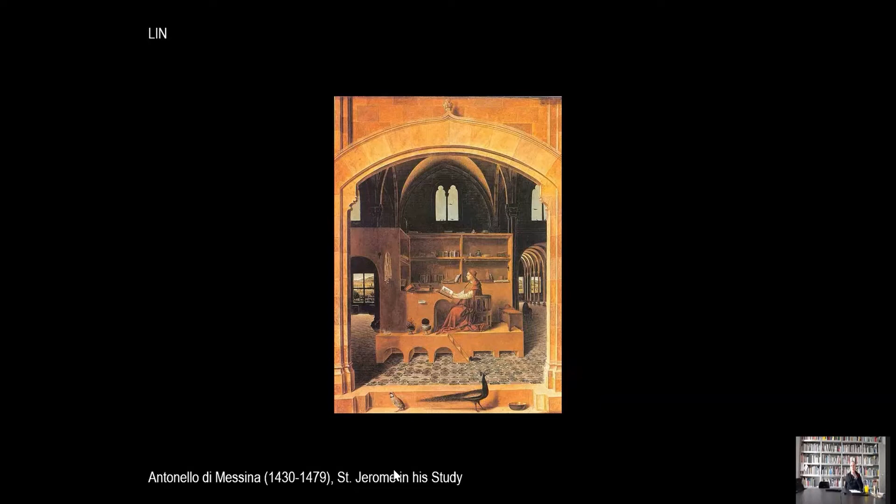I think that's probably what we try to find also in urban situations, in our urban projects—that we don't believe in a predominance, in the absolute importance of architecture, of the places, but also the actions which are possible inside.

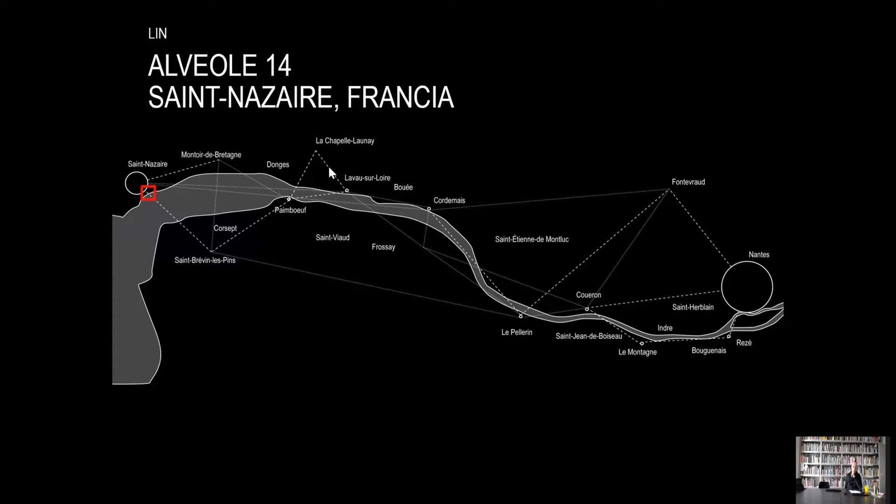And he explained things which were really difficult for us, because it was about the aesthetic of this kind of building.

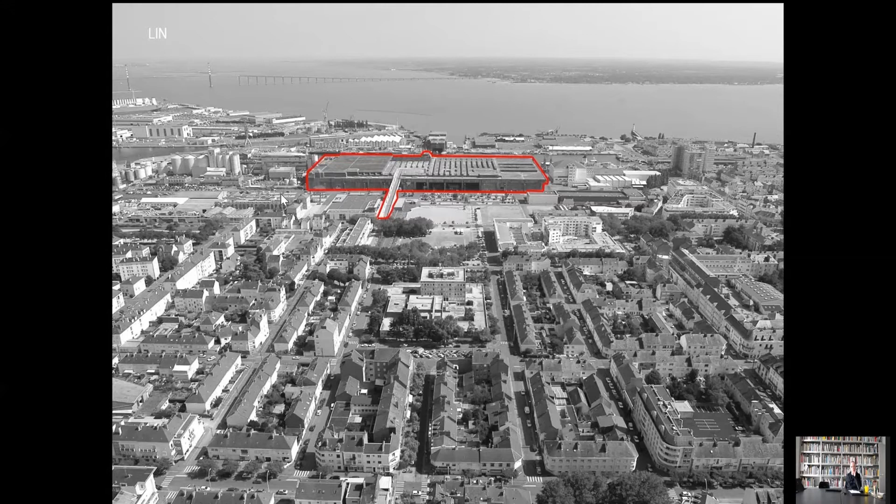You see here the reconstruction, a typical French reconstruction of the 50s by Le Maresquier, an important post-war French architect. You see here the submarine bunker and the bridge, which was conceived by Sola Morales in the 1990s.

So the starting point in many projects in France is that the mayor is really important, and the mayor of Saint-Nazaire, his theory was that the city, which is turned towards the inner country, should turn once again to the harbor. In order to do so, the bunker could be, or should be, a very important step.

His theory was that we shouldn't destroy the bunker, but we should emphasize it and work on it, because if not, nobody would understand why the city is how it is today. So we won the competition for only a small part.

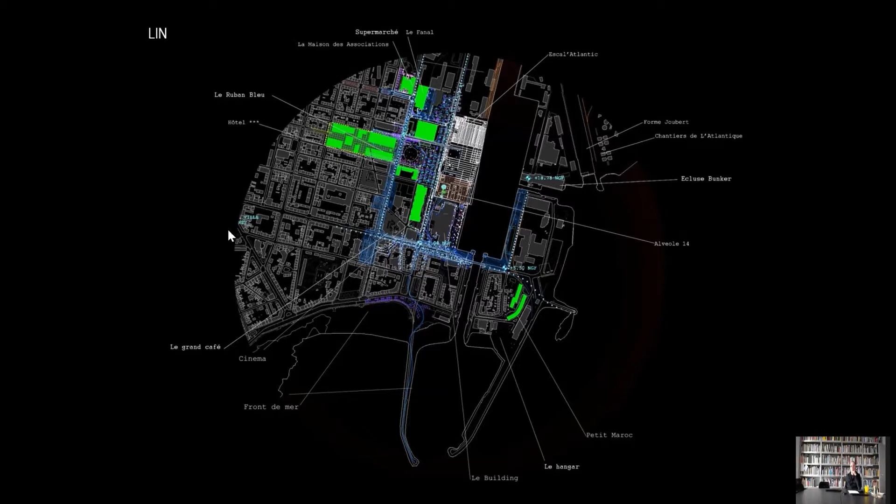We kept even the bassin. We try to work with it, but it's very, very hard. On this side and on the other side, we have the center—sorry, it was not on the right image.

Here you see the bassin, the Center of Emerging Arts on this side, which is open to the harbor with a movable door, and on the other hand, a kind of center for emerging music.

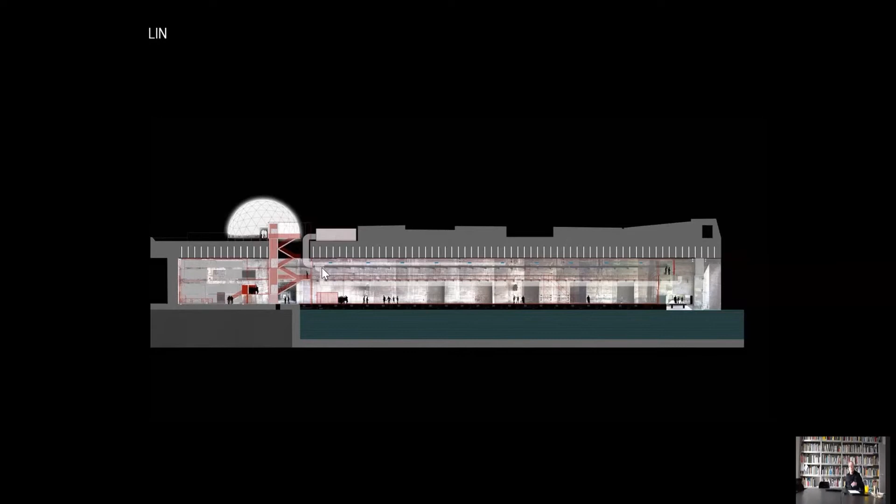We try to do as little as possible, really in order to keep the atmosphere, the quality—even if it's perhaps a terrifying quality—but the quality and the strength of the space.

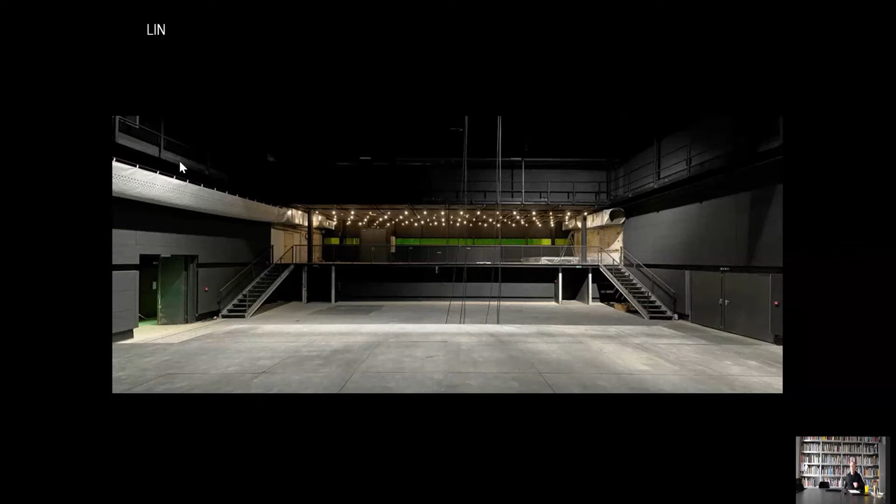On the other side, one view of the Center for Emerging Electronic Music, which is in a kind of bunker situation because it has a lot of studios and very important acoustic issues.

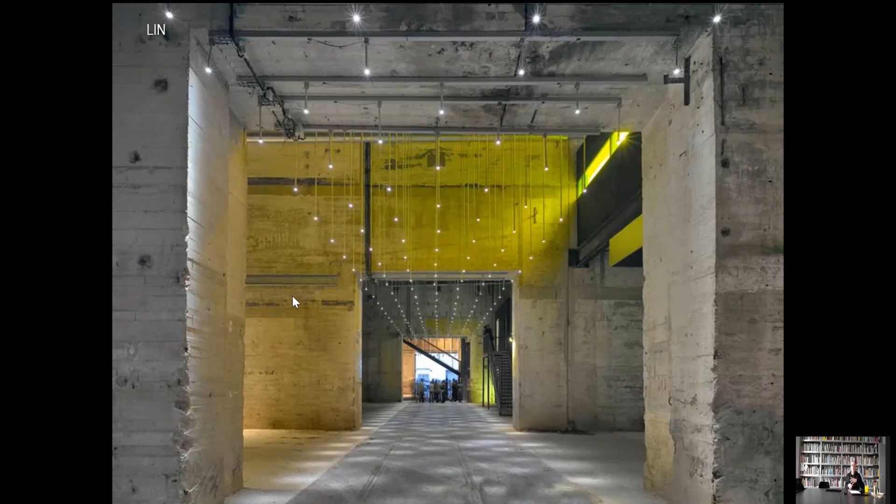Connecting all this, we opened up only a door which finally already exists, which is a kind of lateral inner street, where once again we worked more or less with nothing.

We have here a kind of carpet of LEDs. Here you have part of the musical center. And then one point which seemed to us really important was to connect this inner street with the roof and to open the roof.

I think that was probably the most important point why we won the competition, and on the other hand the most conflictual part, because opening the roof would also mean opening 3 hectares of a concrete desert, and nobody knows what to do on this roof.

So we installed here this kind of Piranesian staircase. We made this hole here, you see—this is only a part of this 4-meter concrete—in order to step onto the roof.

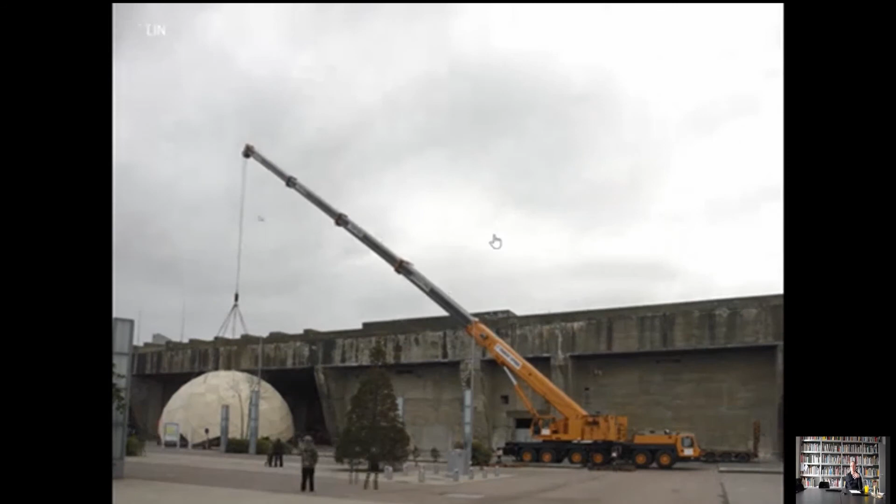At that moment, the radar dome of the airport of Tempelhof—we learned from friends that it would be dismantled. Finally, we managed to get this kind of dome. To bring it, we had to completely put it in pieces. We even had to learn the statics and calculations of a kind of Buckminster Fuller construction.

And we finally could install it on the roof as a kind of starting point, I would say a pioneer, to think about the future development of the whole bunker, but also the possible uses of the roof.

So here you have one slide of this part of the Emerging Center for Emerging Arts. A second project in France, once again also in a kind of military context, is Saint-Étienne.

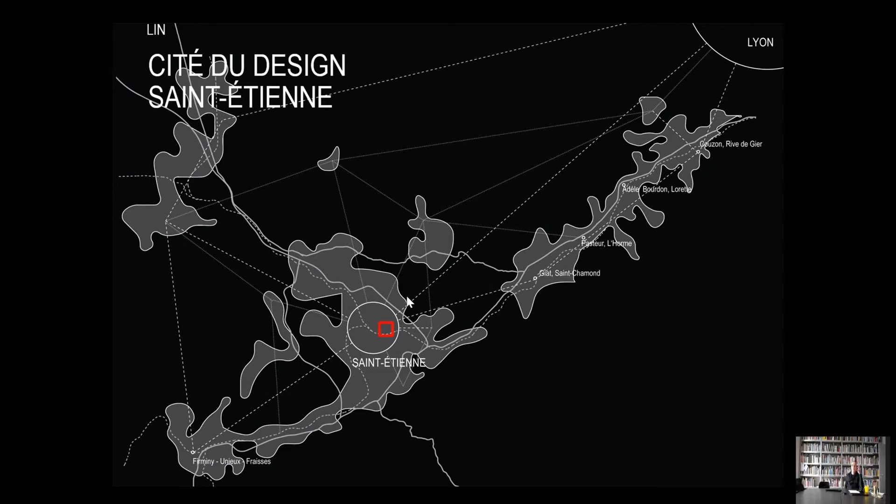Saint-Étienne was an important city in the last century until the 60s, 70s. There were a lot of steel mills and manufacture. There were weapon manufacture, but also kind of catalog manufacture a long time before Amazon or else.

And in the 1980s, 90s, there was a big decline of the city because the steel mills, the coal mines, the manufacture all closed down.

The idea already in the 80s, 90s was to build up on the idea of the manufacture, and they created La Biennale du Design, which became quite famous and was a kind of starting point for the municipality to think about how to reactivate the manufacture site, with this idea of design, a reinterpretation of the history of the city, and to transform finally this huge site, which was a kind of forbidden site because of the military issues.

Only the workers could go there, and the idea was to open it, to install a kind of national design institute, which includes exhibition, design school, an architectural school, archives, exhibition spaces, all kinds of materiotheks, all kinds of things, all turning around design.

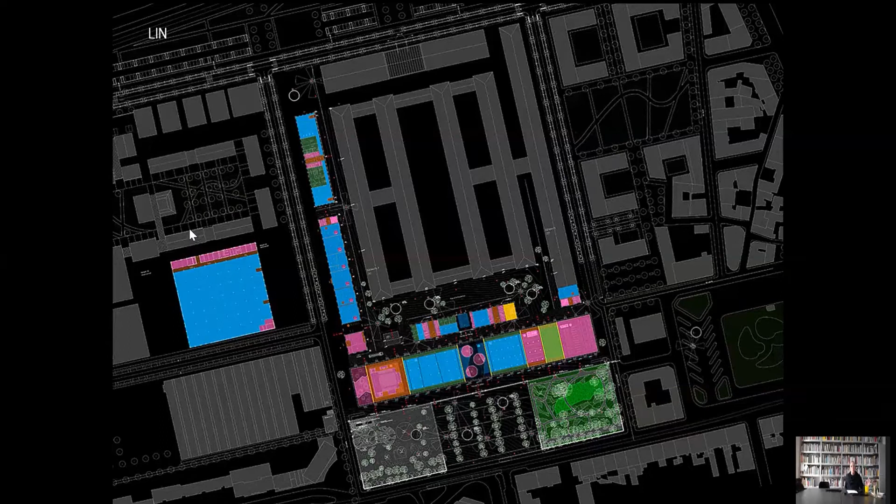You see here some views of the exhibition part, a kind of auditorium in the Platine, the library and the materiothek here, and the greenhouse on this side.

And then on the other side, these really fantastic spaces, which were in a terrific condition when we arrived, but it needed not very much in order to make with these buildings very beautiful spaces to work in different scales and with different possibilities.

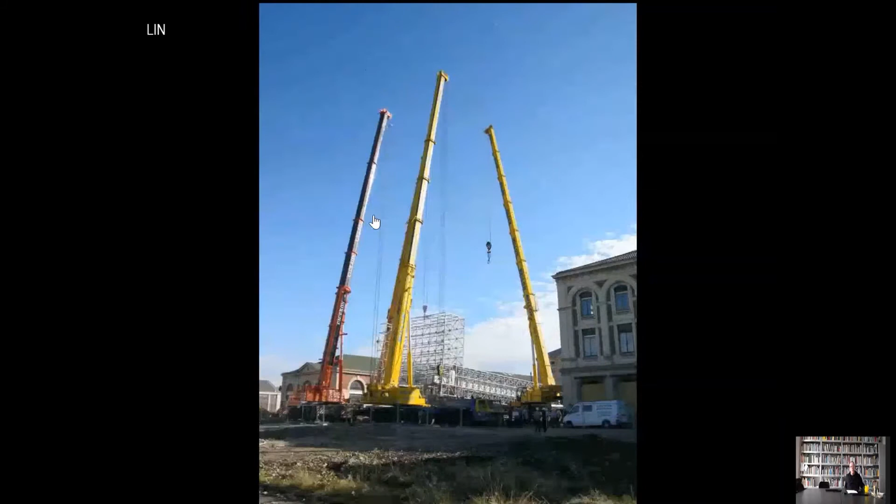So here you see this, at the very beginning we convinced the municipality to build this really at the very beginning in order to open up the site and to give the possibility also to the people of Saint-Étienne to discover the manufacture and then to discover little by little the construction of the new institution.

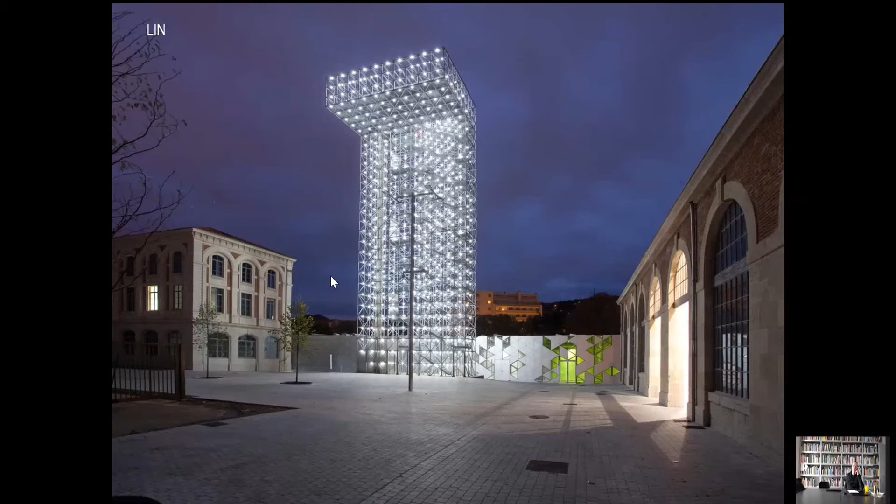Here one last view on this project. So here, for example, you see an opening. Sometimes we had to open parts, we had also to demolish some parts in order to connect everything, but we tried to do it with a very minimal impact in order to give the possibility to these existing buildings really to play their own role with their own quality.

In a completely different scale, around the same time as the Cité du Design, we had been invited as one of the 10 teams of the Grand Paris. Sarkozy named it Grand Paris Métropole post-Kyoto.

Very roughly, the intention, I think, at this point of Sarkozy, of the president, but also of the Ministry of Culture and a lot of people, was to get rid of this kind of extreme situation where you have Paris, which you see here in the center, which is finally a very small part of the metropolitan area of Paris, with 105 square kilometers, where you have all the richness, all these fantastic situations, and around you have what was named, or what is still named, La Banlieue, with 3,500 square kilometers. And this distinction, or this rupture between the center of Paris and the periphery, is really very difficult to compare with other metropolitan areas such as London, Berlin, or Tokyo.

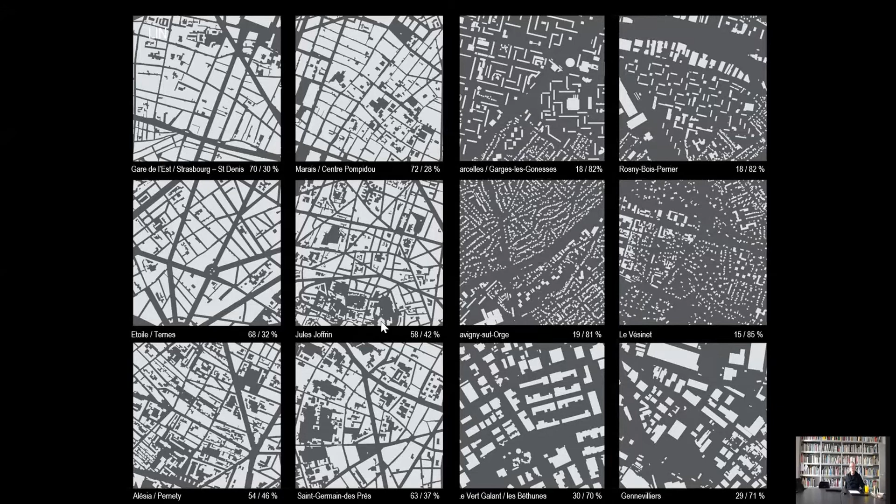One very specific point is that this empty, unbuilt space is not an open space, not a continuity, but a kind of patchwork of little entities which are all closed off from one another. This makes this open space quality not at all relevant in the way it could be.

In our work, more and more, we started to think about the polarities - urban polarities, industrial polarities, cultural polarities, big forests - and three important themes emerged. On one side, the polarities and la ville légère, which we think is perhaps less dense, less defined, probably more provisoire, but more flexible, and which is a very important value for a metropolitan area.

Then the important issue of mobility, which in France is overall very concentrated to the center, and how to create a network which could be much more rhizomatic.

And the third part is integration - bringing forward the really fantastic natural sites which are in large part hidden today, and where it needs not so much in order to bring them back into the mental map of the Grand Paris.

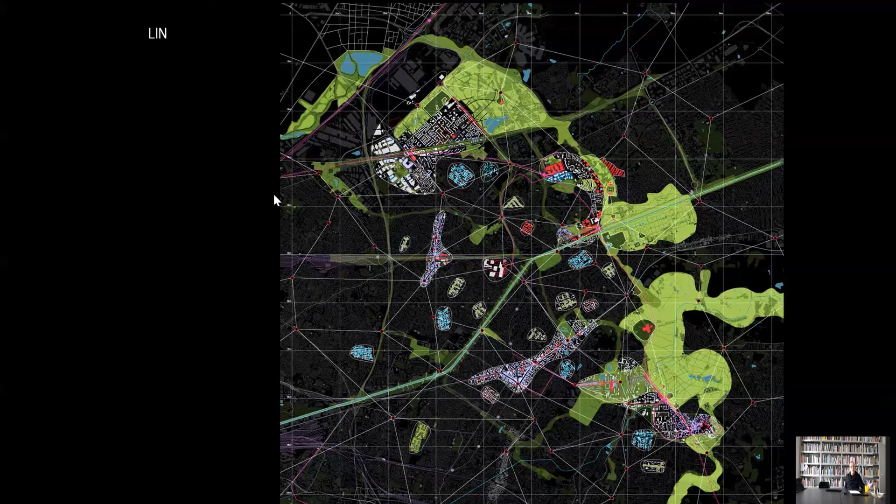Here I can show only some pictures. I mean, this kind of...

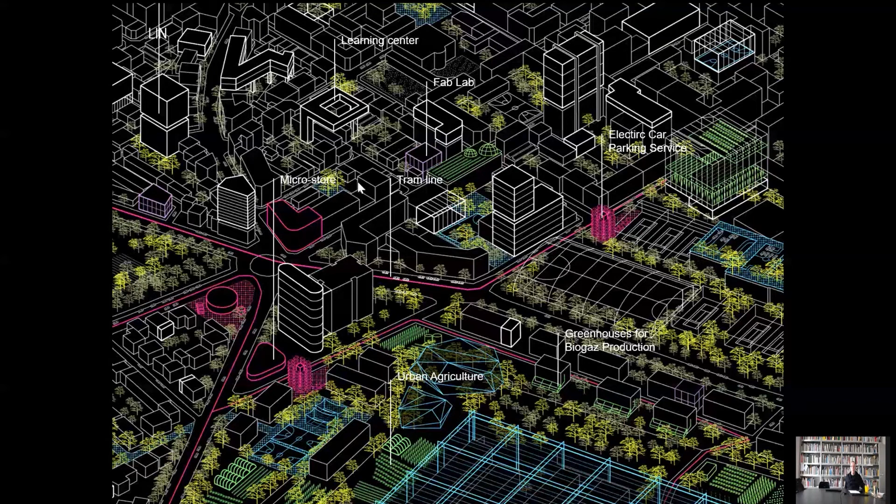It's too difficult now to explain in detail, but what is important for us is not to change radically the cityscape, the skyline, the urban density, but more to try to find what are the missing points, what are the already existing qualities, and how we can start as little pioneers to improve, to intensify much more, to intensify rather than densify the existing situation of this kind of entre deux.

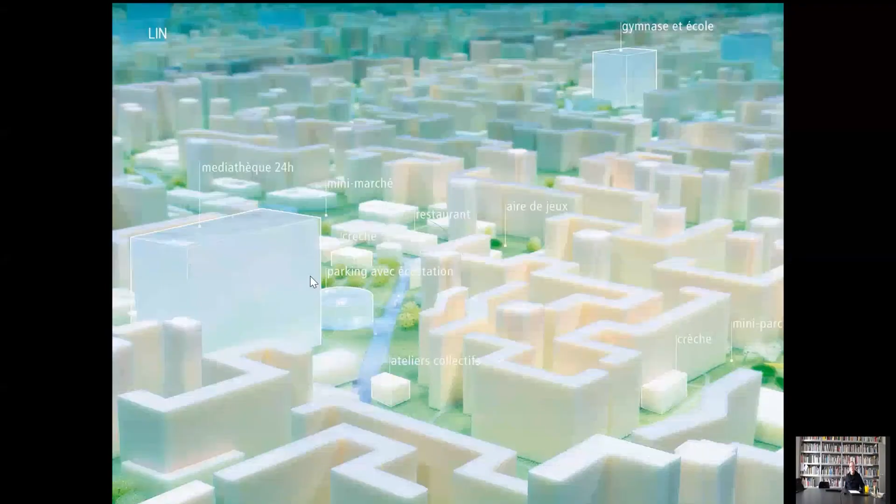Here more work in quite difficult conditions in the Grand Ensemble. And here, of course, this kind of ville pavillonnaire, this single family house carpets. Also here, how perhaps to connect sometimes, how to bring a different mobility, so that people don't have to use the car always, but also to bring sometimes wherever a Fablab, a school, a kindergarten, in order to make these areas more sustainable.

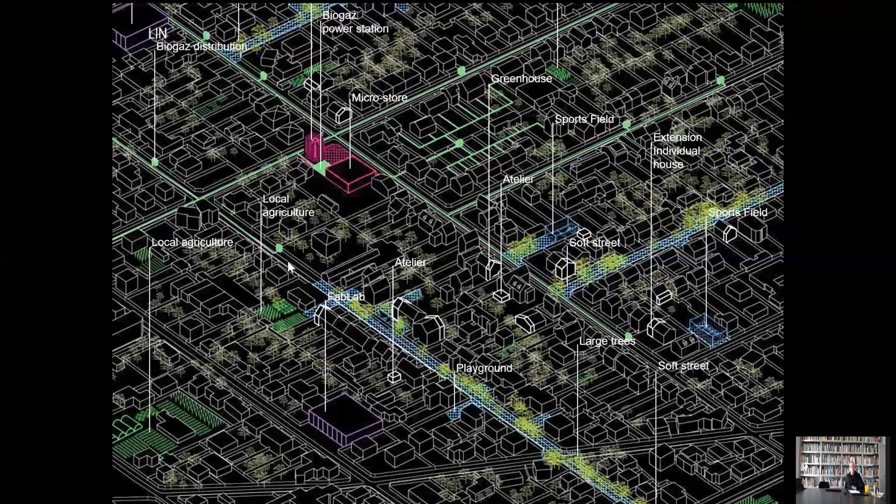No, that's radically different. It's for us really a kind of, it's the opposite.

We won a competition in Paris on the front of the Seine, one of the very last spots which were more or less empty. There was an old La Société des Explosifs, a kind of Dynamite Nobel, French Dynamite Nobel, a little factory, which had to leave, and we won the competition for this part here.

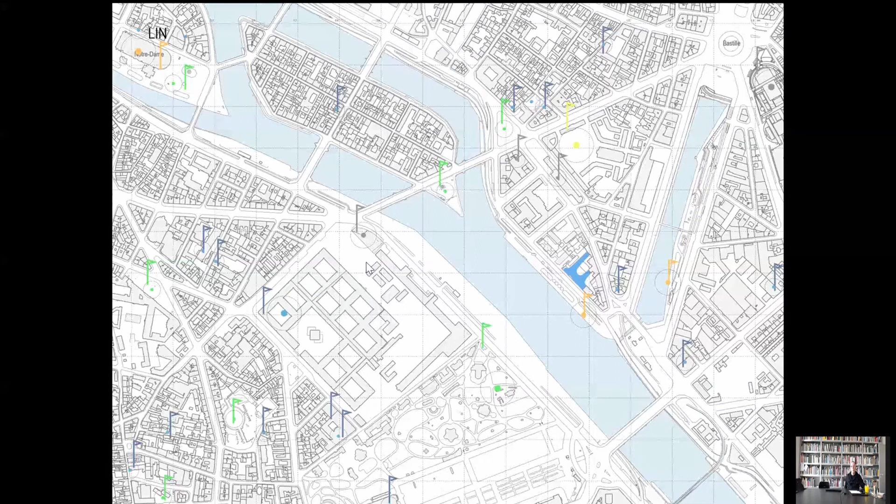Respecting very strict urban rules, with one advantage, that in Paris for this kind of project the city now obliges the developers to build 50% social housing. That means 50% social housing, which the developer has to sell back to the city for a very low price, which means that the rest of the apartments have to be even more expensive. And so it became really a kind of very difficult exercise. You see here the building with a large opening to the Seine.

Perhaps what you can see here is that these floors are higher, and they became lower and lower. This has one reason: we made a building which is very deep on the first floors, and it becomes more normal on the upper floors. So the deeper it is, the higher the apartments are, and the higher they are, the more expensive; the lower floors are, by contrast. So there's a kind of balance between different qualities.

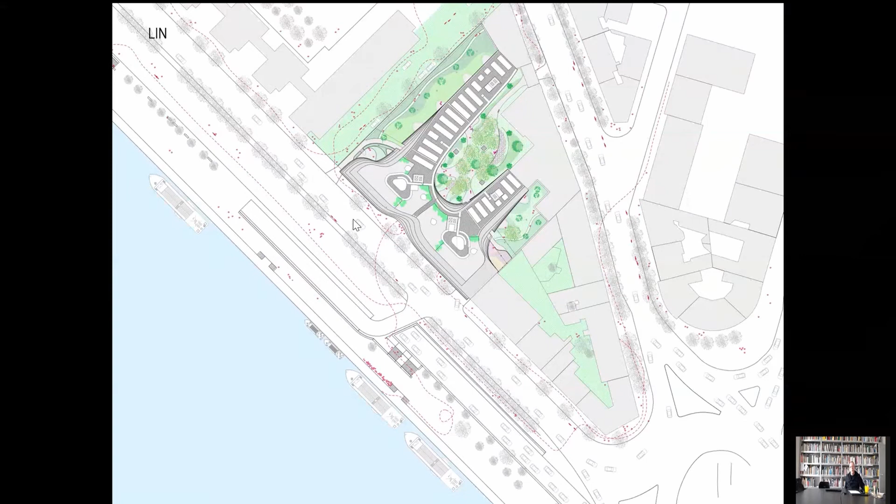You see here a plan with this front. Of course, these are the expensive apartments they sell, and these are the social apartments. One thing which was really important for us, and I think we succeeded quite well, was that all the apartments here go through and have a lateral view on the Seine. And these inner apartments also go through, and they have two gardens, which you will see perhaps here.

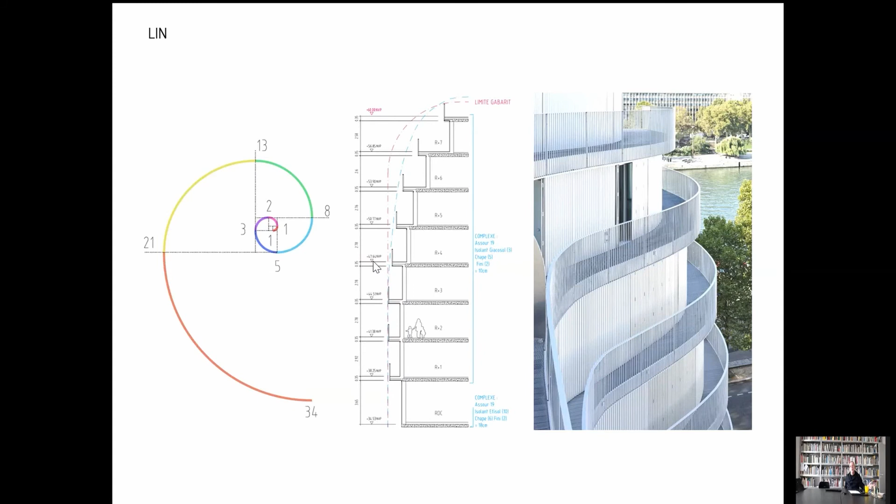So here it's this kind of Fibonacci—it becomes more and more, less and less high, and it steps back, so that here we have normal depth, and here we are 16 meters deep. You see here Notre Dame.

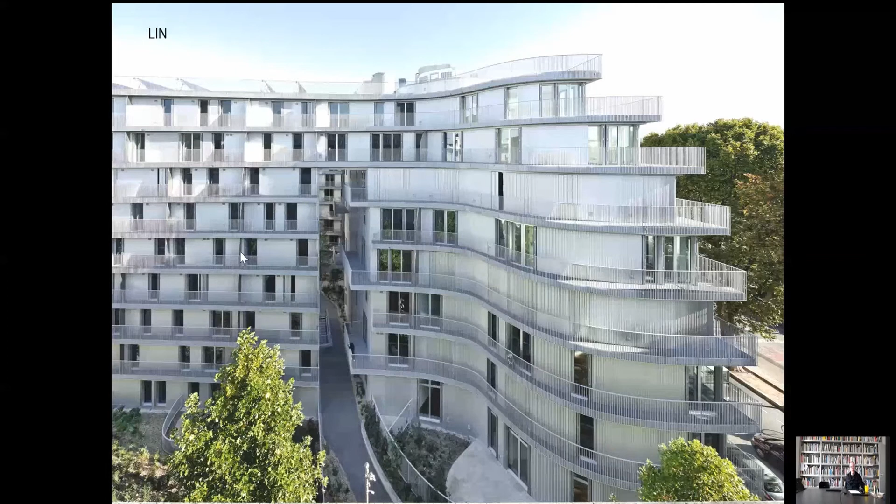You see openings to the inner squares. Another point which seemed really important to us: normally in these projects, the developer side and the social housing side have a completely different architecture and facade, but we convinced the developer to have exactly the same quality, the same material. The only difference you see here is that this side has one floor less, so it has higher spaces, but at this point they meet again. Here you have 1, 2, 3, 4, 5, 6, and here you have 7, but they all have the same height because they have more or less the same depth.

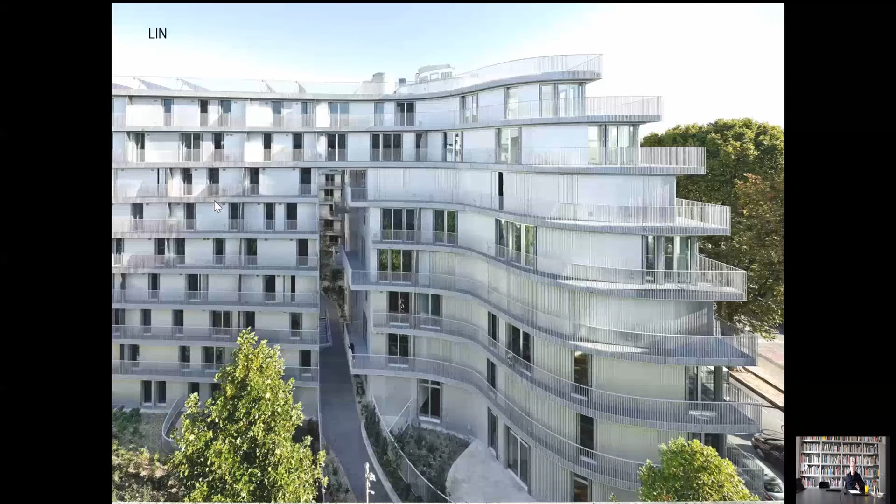This floor plan, which was really a kind of long research, led finally to 71 different floor plans, which were also quite a nice challenge for us. Here you see the inner part. Okay, now I come to Germany—I have to speed up a bit.

You have finally these periphery situations, not in the periphery, but sometimes really in the center of the city. And that creates a very interesting and very specific quality, if I can say.

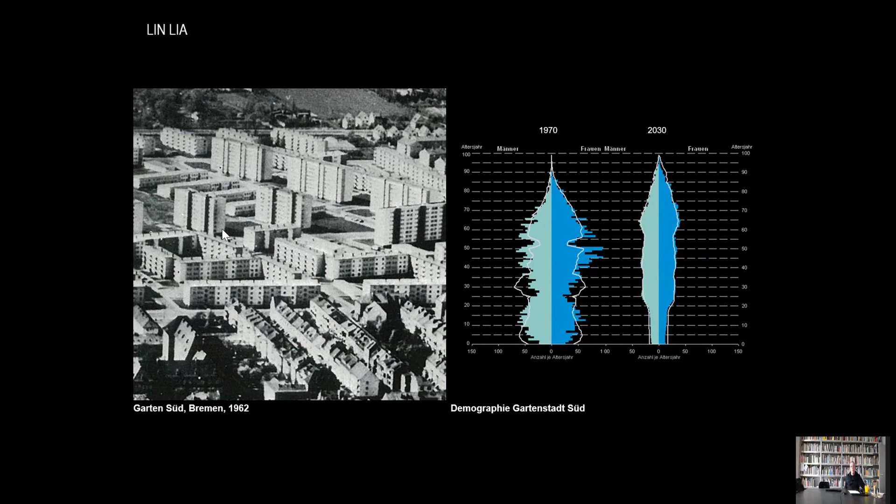This quality leads to a situation that the people who occupied the apartments when they were built in the 60s - you see here the demographic distribution then, and this is the demographic distribution today - because these people like their apartments and they stay, even if there are real issues: the apartments are old, there's no proximity services, 80% of the apartments are all the same, 3-room apartments with small bathrooms, not at all adapted for elderly people, no elevators at all.

So there are problematic points, but on the other side, the people like to live there. It's this kind of, entre guillemets, Gartenstadt idea, which the people really appreciate, and they would like to stay.

In this situation, the city and the shareholders of this Siedlung know that the problems will grow now with the people becoming older and older. So they started a kind of experimental competition: how to change, how to give a kind of mixity or hybridization in this kind of area.

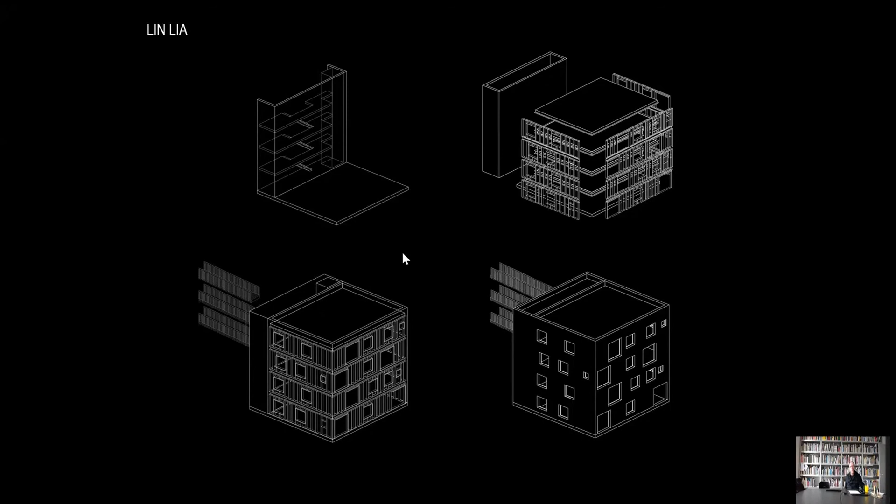What we proposed here with our idea of Bremer Punkt, which means Punto di Bremen, was to develop a very small unit, 13 meters by 13 meters, with a prefabricated concrete frame, no cellar - no underground construction - and all the rest in wood, in order to be able to build very fast with minimal impact for the people living there, and the possibility to bridge these buildings with elevators and different apartments, possibly to the existing ones, in order to give the existing people access to elevators, and perhaps also to generate multi-generational apartment types.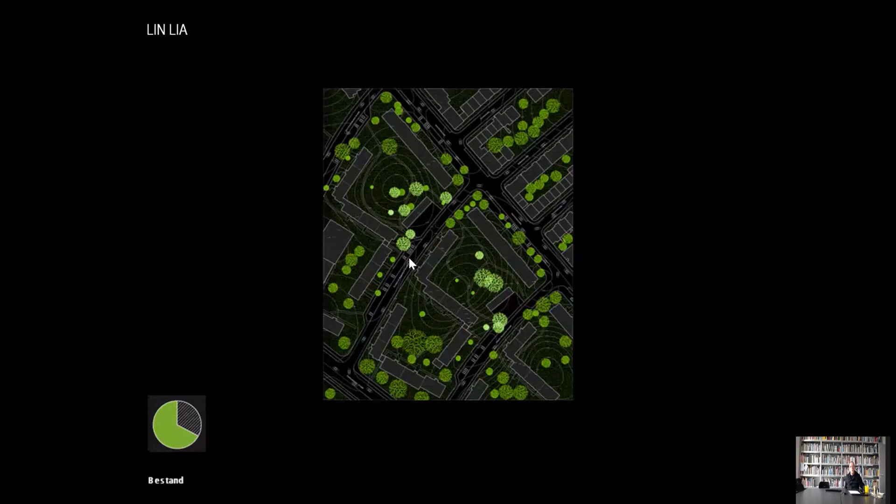So that was our proposal, and it was a kind of experimental proposal. Finally, the shareholder of the Siedlung asked us to make a prototype. Here you would see how it will be when it's bridged.

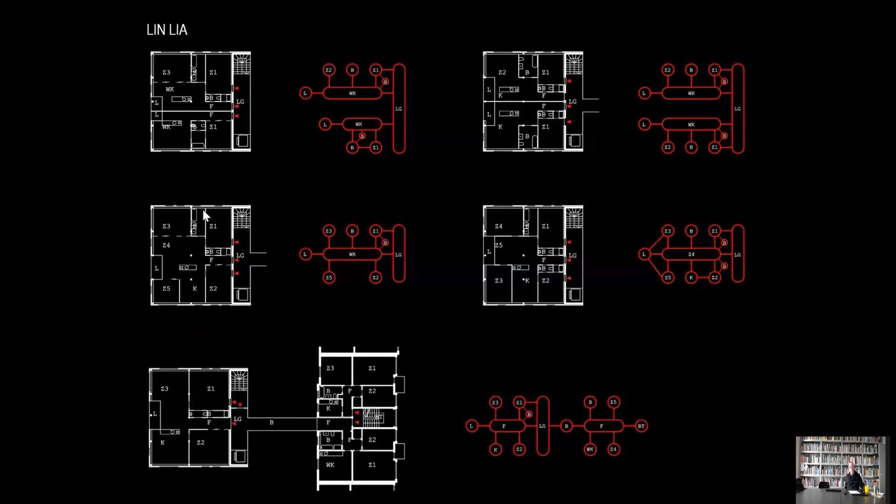To make a prototype - here you see the prototype, which was built in 29 days. Which means for the neighbors, of course, there's a construction site, there's an impact, but the impact is really minimal in relation to a normal construction site, which needs a minimum of 12 months to ensure.

So here you see the first prototype with this kind of Laubengang situation on the other side, and the possibility to link bridges to the existing buildings.

This small unit, as it's quite small, 13 meters by 13 meters, is free span. So inside it's completely flexible.

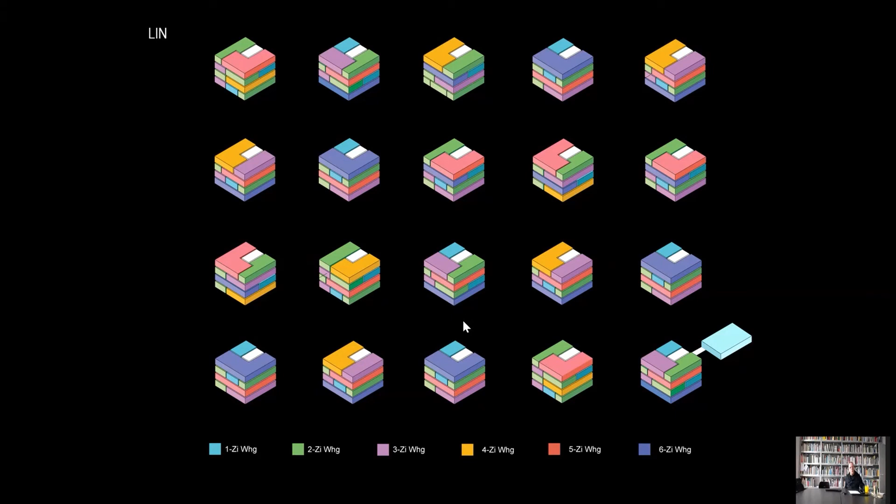The different apartments are really completely flexible, and you can also mix or superpose more or less every type. Here with the idea, for example, to have elderly people living here linked via a bridge perhaps to another part of the family, so as to have a kind of interesting multi-generation habitat.

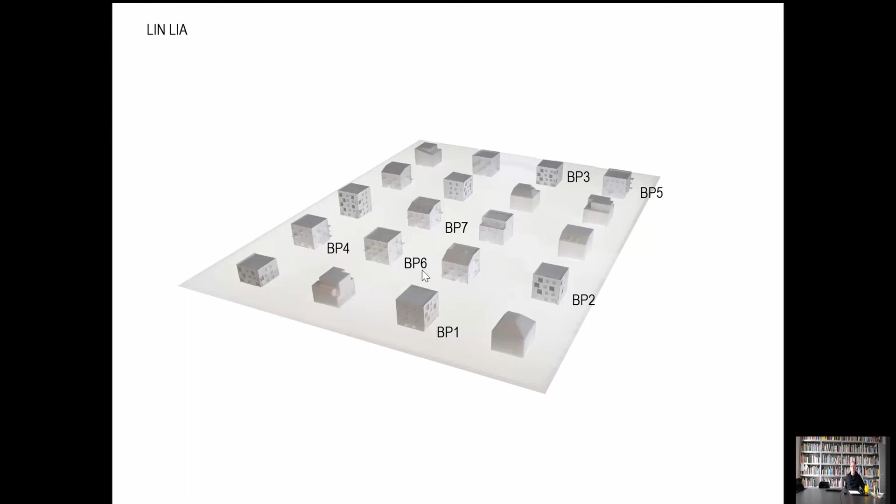It started with a prototype, and now we are on our 12th module. You see it here. They are built now in different situations, always with this idea to integrate where it's possible. And here it's quite funny, because on one side you see this kind of Siedlung, and on the other side this kind of small houses, and the opportunity here of a kind of old infrastructural site between these two areas.

Very fast here - finally the same idea in Berlin, but much bigger. An important housing company, a social housing company, made a competition which we could win two years ago for a similar idea, but much bigger.

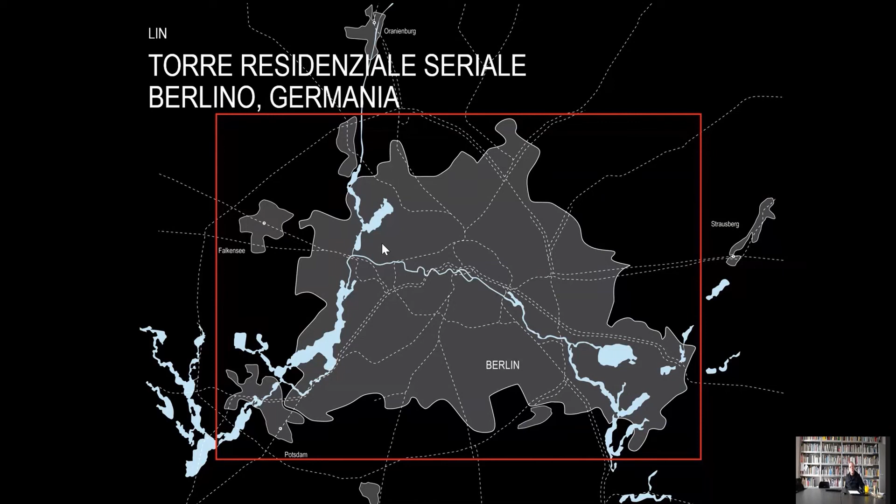In Berlin, in East Berlin, you also have this kind of huge prefabricated housing complexes with a lot of undefined green space. This company, the Howoge, owns more or less - not all, but large parts - of all this part of Berlin. You see here, perhaps here, Tempelhof, the Tiergarten - so it's the eastern part, but it's still more or less the center of the city.

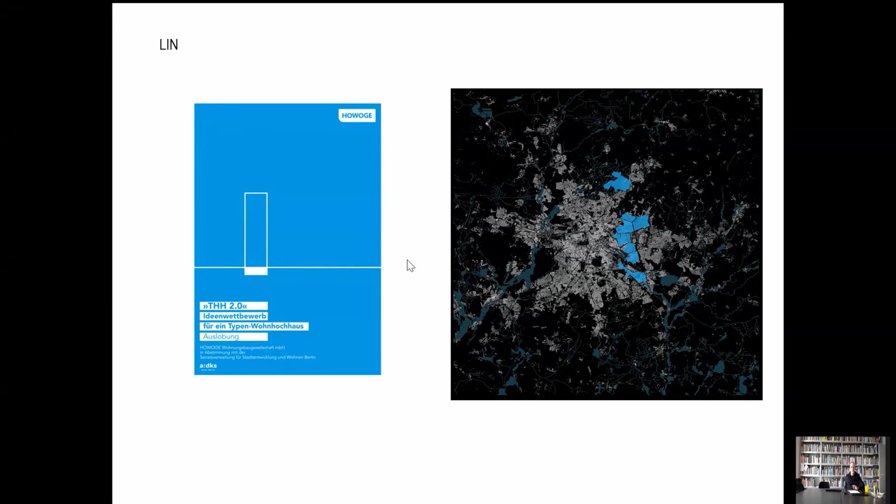And what they wanted was a kind of Plattenbau prefabricated tower 2.0 - meaning the prefabrication of the 60s, 70s, 80s of the GDR, but with the qualities of complexity, of diversity, of architectural quality. So our proposal was - we investigated - it's a very simple diagram here.

This is the typical Berliner Block. Very, very dense, with courtyards, but most of the ground floor are public, or workshops, or ateliers—they are active.

In the GDR you have these huge housing blocks, and then sometimes you have this kind of huge prefabricated elements for swimming pools, for Markthalle, for a lot of different things.

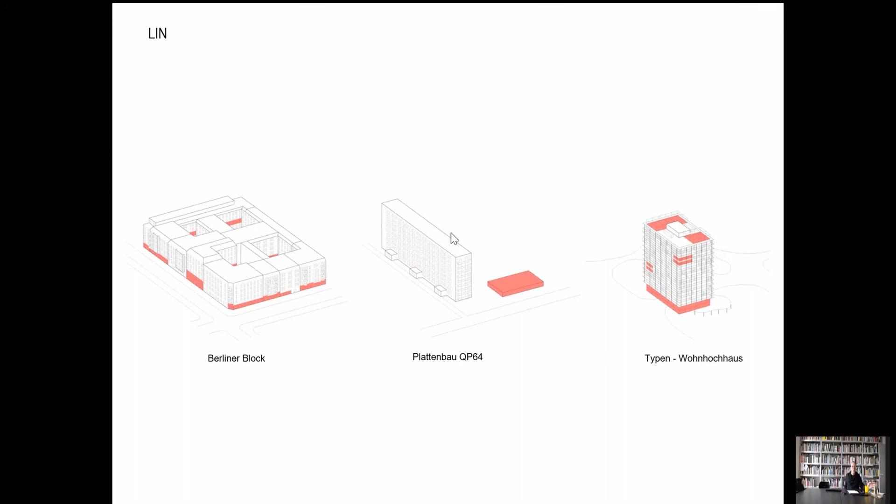And this is our proposal here, a kind of, once again, like the Bremer Punkt—something prefabricated, but with an active ground floor, inside a kind of more or less open distribution, with sometimes public elements and also the roof public. Here you see this kind of more public parts, the ground floor open, and then here the normal housing areas.

What is perhaps a bit bizarre in our project is that we don't have a double ground floor—it's always 3 meters, 3 meters, 3 meters. So you could also partly say we put apartments in some parts of the ground floor, or we make really much bigger spaces. Normally in Berlin you are obliged to build 4 to 5 meters in the ground floor and then lower.

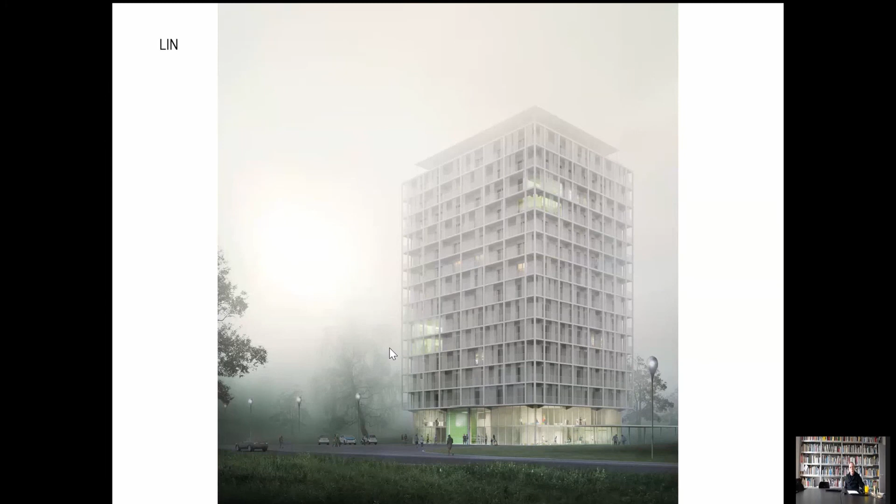And finally we convinced them that it's 3 meters starting from here. So in this perspective it's double height, but here, for example, it's already housing in the first floor, with a kind of quite sophisticated...

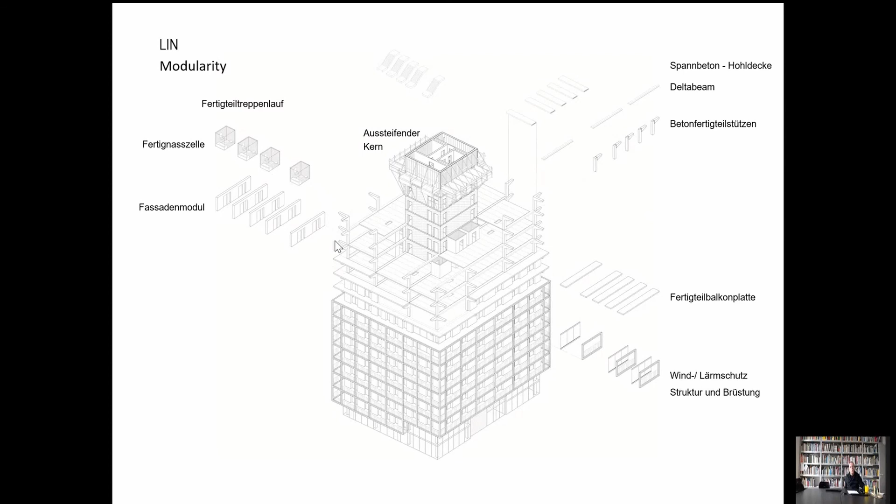Prefabrication structure—yeah, I can't explain it fully. It's a bit the idea of a very, very simple structure which could then react with different elements to different situations. What I mentioned, this kind of idea of a public inner distribution, a bit.

We are quite impressed by the typology of the Greek polykatoikia, which plays also between really private housing and publicity, and then this kind of more public parts in the roof.

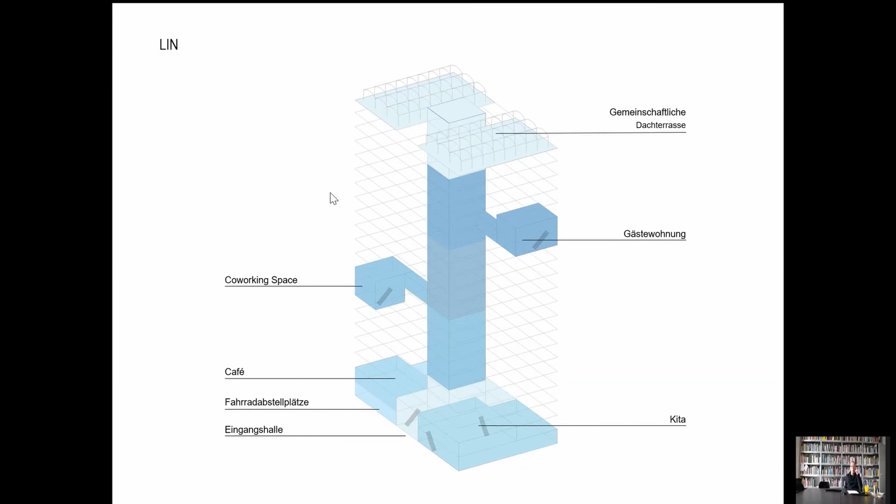So, and for the moment we make the studies with HOWOGE in order to place the first prototype, a collage.

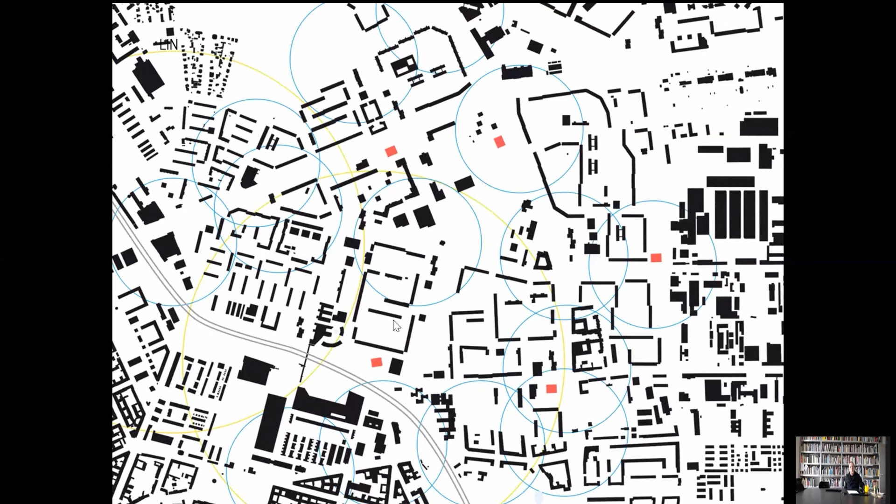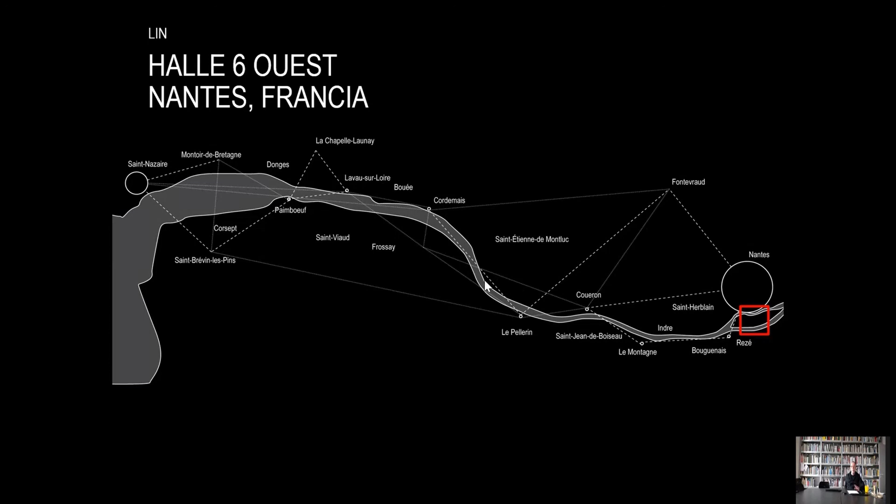And that's the last project we just finished, where they could win the French Équerre d'Argent, which is an important architectural prize. So you remember I started with Saint-Nazaire, now we are here in Nantes, L'Île de Nantes, which was a kind of...

...industrial part of the city of Nantes, which is here. All what the city didn't want to have in the city, they put it in the island of Nantes. So there are power stations, there are a lot of things, there are big railway areas, and there were this kind of very famous chantier naval, the shipyards.

And what the city of Nantes, together with landscape architect Geipel, they started to make a very careful transformation of the Île de Nantes, where they didn't demolish. They tried to keep some major elements, and there are, for example, here there are really very nice...

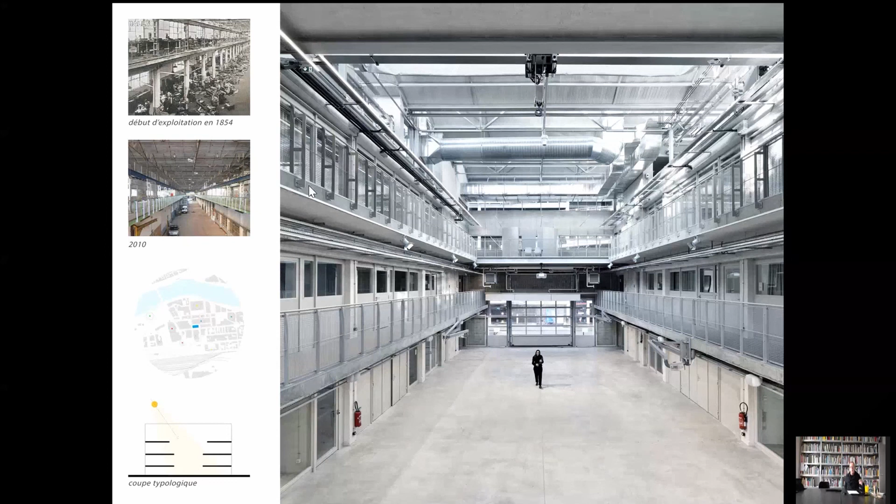...halls, but now it's more and more come to an end, and we could win the competition for a hall here, one of the last existing halls, for a program for the university to make a kind of innovation center for digital arts for the different departments of the University of Nantes.

You see here the existing hall. It was related to the shipyard. They built here the propeller for the ships, and finally they wanted to have a program which was much bigger than what could be really filled here finally in this hall.

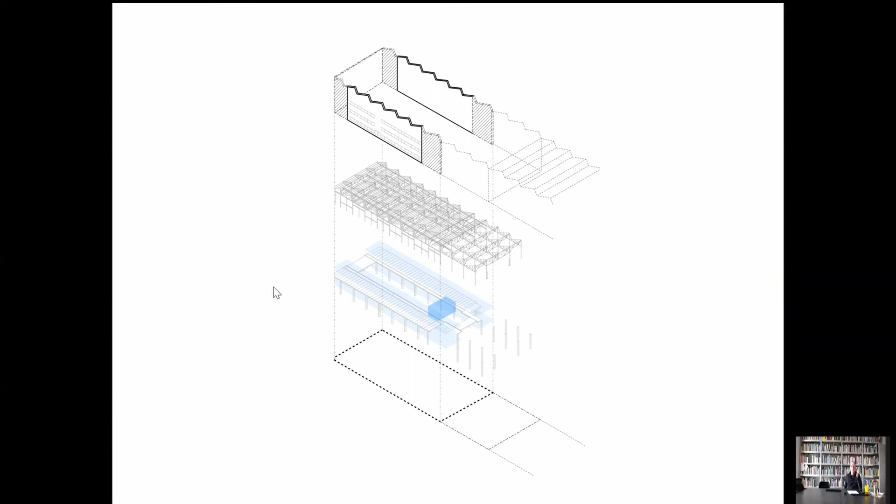So it was even open in the competition to demolish. What was our approach, that we said we would like to keep more or less all, and what we tried to do were to densify the existing structure by putting 2 new levels of mezzanines, but keeping finally this kind of basilica typology by putting here and here a second mezzanine. So they are quite low, sometimes they are double high, but finally the hall, in its structure and also with its simplicity and flexibility, we could keep it completely.

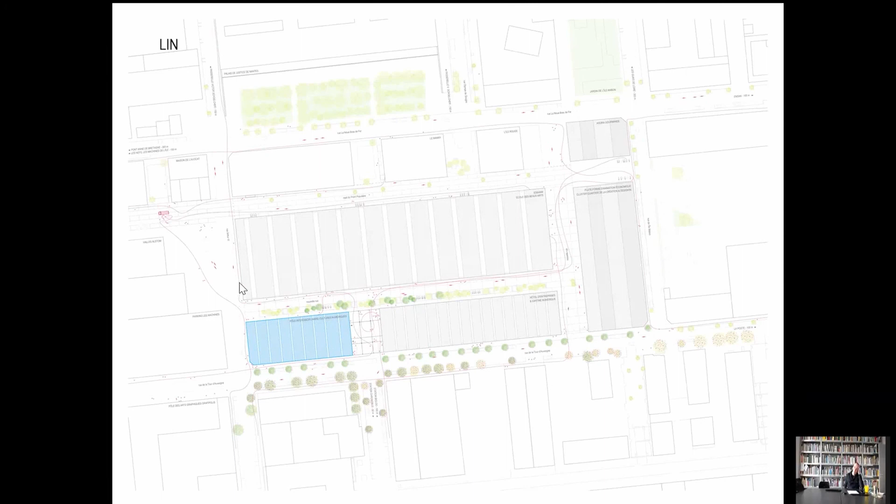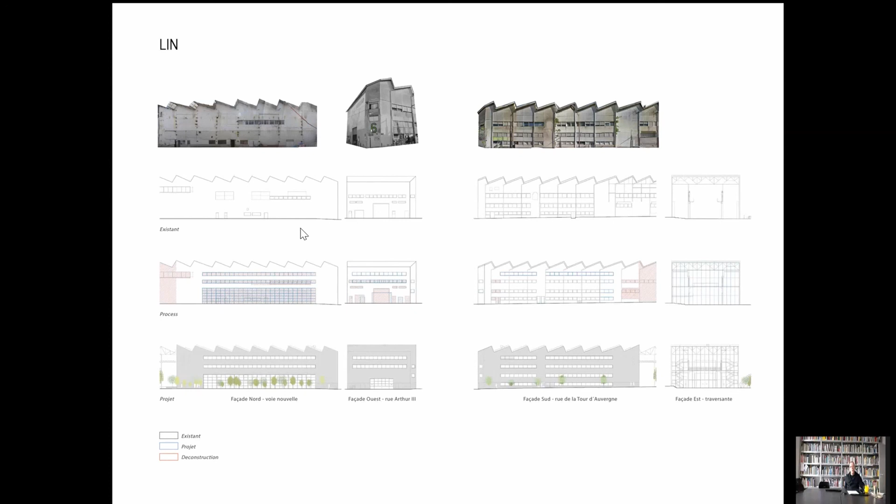You see it here. Here it's a new art school, and it's finally quite a small piece, but it was a very intense work and also discussion with the university, because they wanted it much more open and modern, and we tried to work really on this quality of this very simple industrial hall, by adding or removing only little parts in order to create this kind of institution.

So there was one element which was much too big to put it here, and finally we decided to put it in a kind of black box, which is on one end of the hall, with very thin columns.